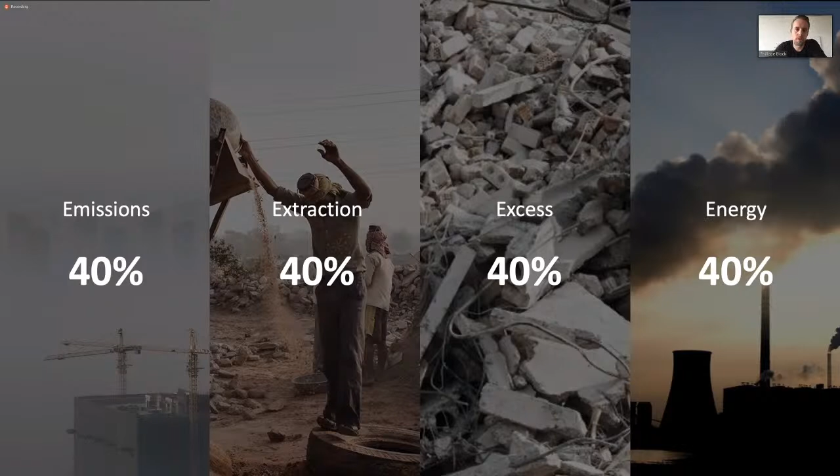We are responsible for 40% of human caused emissions, so that relates to pollution. We extract a huge amount of natural resources. We cause, and these are all global numbers, a lot of excess, which is the waste, and then energy as well. So with these few initial statements, I hope that you agree with me that we do need to rethink how we design our structures, but also how we build our structures. And as a structural designer, I particularly feel responsible to try to act and to react to this.

One has two kinds of emissions. The blue one are the embodied emissions, which are somehow constant. That is what is related to the construction, to the building materials used in a construction. And then the orange one is the operational energy. One could argue, and I'm showing this here on the right, that with greener sources of energy, you can very simply reduce this. But what to do with everything needed to construct your building?

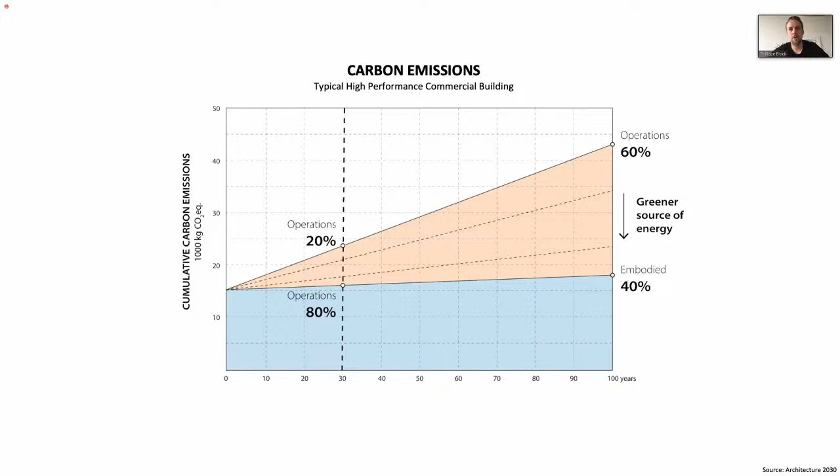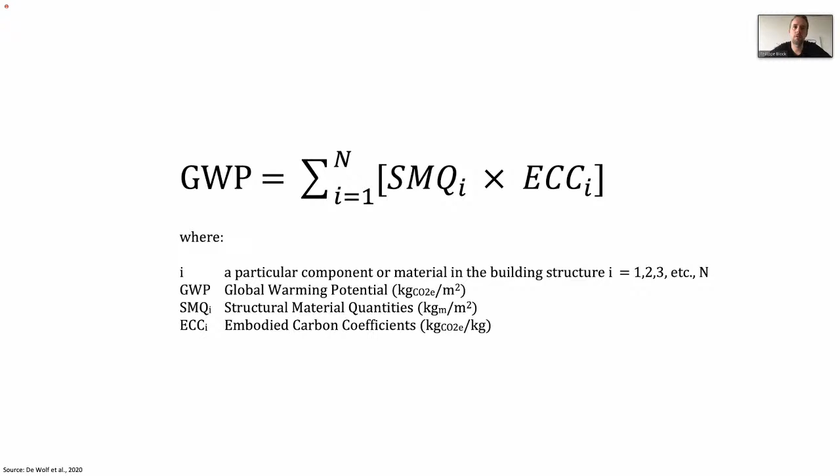And this will be the only equation that I will be showing, it's actually quite simple. You have two things you can work on. Either you can significantly reduce the structural mass, so the volume of structure used, or you can, and that's the ECC, reduce the impact of that specific material. I will show strategies how we use strength through geometry, but also something which we coined as material effectiveness to address these things. Notice that material effectiveness is not entirely the same as material efficiency, and we will see why that is important. And as introduced, we use computational design and digital fabrication as opportunities to bring these potential innovations to market.

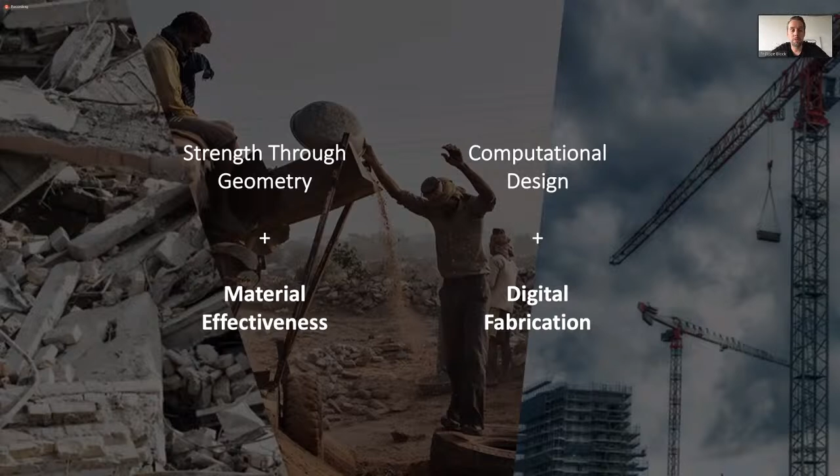My group is now exactly 11 years old, and in the first decade, roughly, we did a lot of prototypes, a lot of exhibitions, we had the opportunity to work with some star architects to have this kind of visibility. This was extremely important, and I believe these kinds of demonstrations are very important to start a dialogue with your colleagues, but also with people from industry. But all of this is really not enough. So now we are trying to get to that next step and make things really happen. I'm looking forward to the next decade of hopefully impact and not just appearing in magazines.

So first, before I go to the main point of strength through geometry, I want to tease a little bit with a few things that we are doing by combining computational design and digital fabrication. And for that, I will also show a shell structure. So here, maybe a first hint that double curvature is really good.

This is a Pringle, so a chip, carrying 500 times its self-weight in quite a bad loading case. So this maybe already shows you that geometry can really help us to create a robust or stable structure.

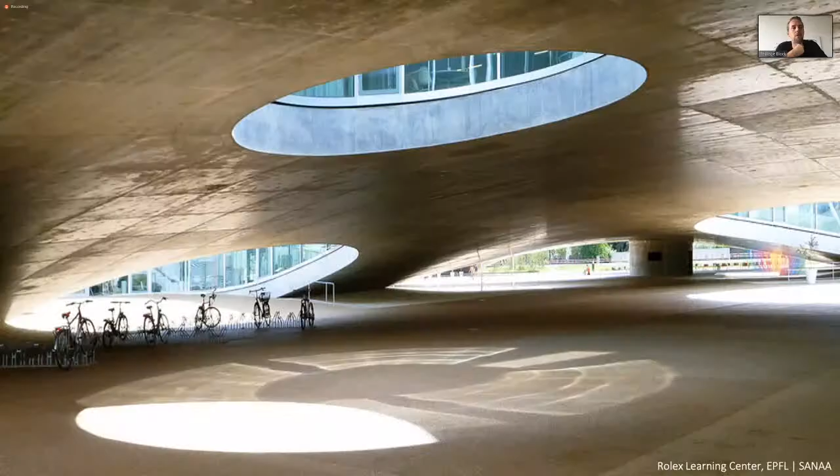But we don't see too many beautiful surface structures, for example, in concrete, only for unique projects like the Rolex Center in Lausanne here. And this is only for unique projects because they need a unique budget. And this unique budget goes to providing a full foundation, all the scaffolding, then often months, if not years, in fact, of milling and fabrication of a formwork that will turn into waste after only 28 days.

So we wanted to challenge this kind of process by introducing or further developing flexible formworks or super lightweight formwork that takes out much of these inefficiencies. So this is a hybrid cable net and fabric formwork. And in a nutshell, this slide maybe nicely summarizes what we're after.

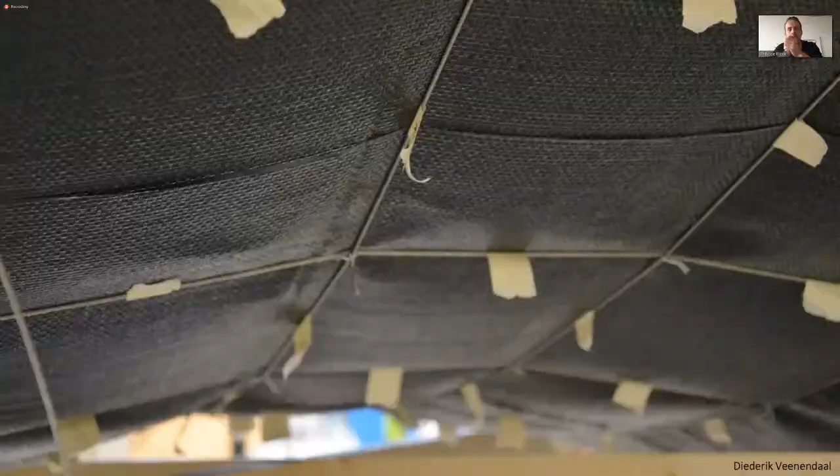So on the left, you see the status quo, where basically through brute force, a fully rigid formwork, you keep the geometry where it needs to be. And then you see indeed the foundation, the logistics, and also the cost of scaffolding, but then most importantly, the formwork strategies that are almost standard one-offs.

And on the right, you see what this could offer. So you can significantly reduce boundary conditions, so foundations, but also you can practically take all waste and material out. You could even design it to be reusable. I will talk about this later. But also you see that the space below can be already used so that the next stages in construction can happen.

One thing that has to be said is that nothing comes for free. So if you want to have these efficiencies, then you need to design also a formwork that follows the logics of how to generate a stiff formwork. So it means that you cannot just have an uninformed design and then try to make it with an efficient formwork. No, you need to fully embed into your design process the limitations, but in my opinion, also the opportunities of such formworks.

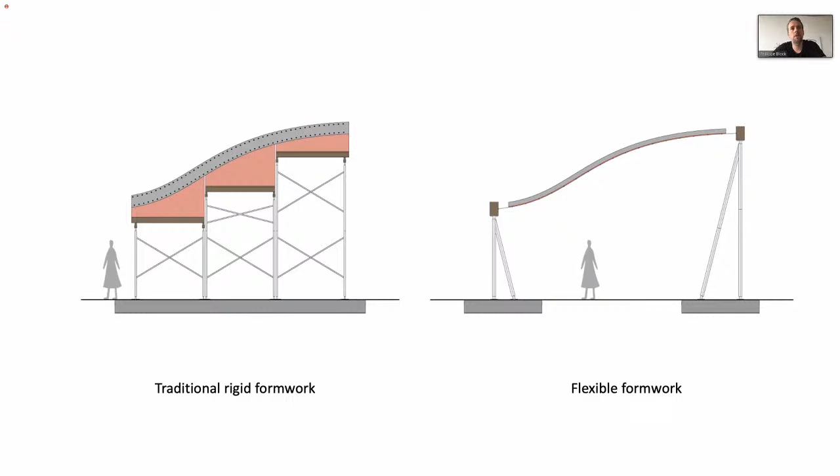So the idea is to use something so lightweight to build a concrete shell. So this was the cable net of a prototype we finished in 2017 for a project that is now on site. And you maybe already see how lightweight this system is. So for a concrete shell of more than 20 tons, we will be using a formwork of only 800 kilograms. So here you see 500 kilograms of cable net.

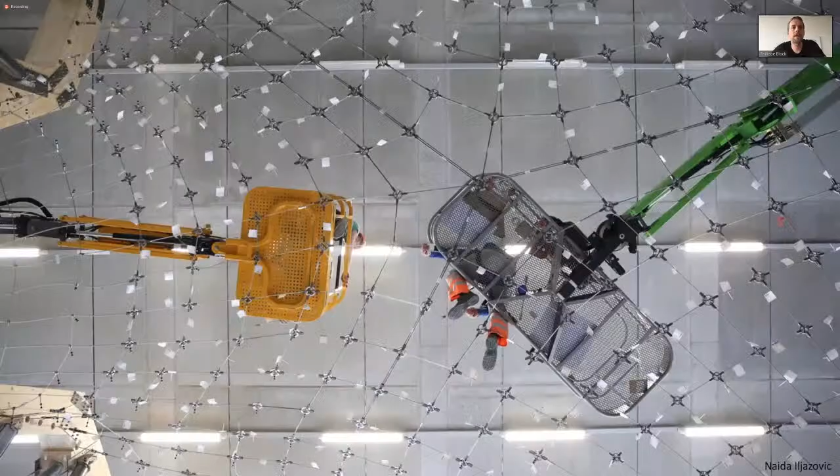We designed it such that it came together like a kit of parts by a very small team of 3 people in just 1 week's time. And again, this might sound a lot, but compared to literally the months of preparation, of milling, also the assembly, the complexity on site, I would argue to realize this non-standard geometry with this kit of parts is quite an easy task.

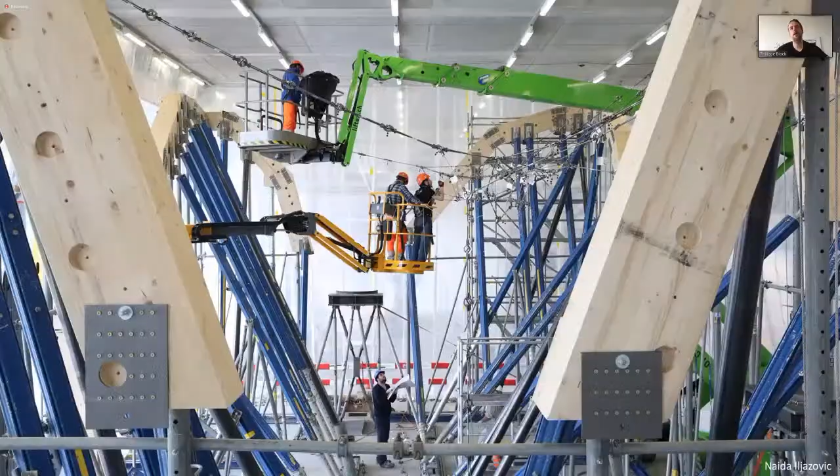Then after this cable net is assembled, the fabric comes on top. We had to, of course, develop some algorithms to correlate the pre-stressing of the cable net to get it exactly where it needs to be, because the system here is actually pre-stressed so that under the weight of the concrete, it settles and it hits exactly the perfect geometry.

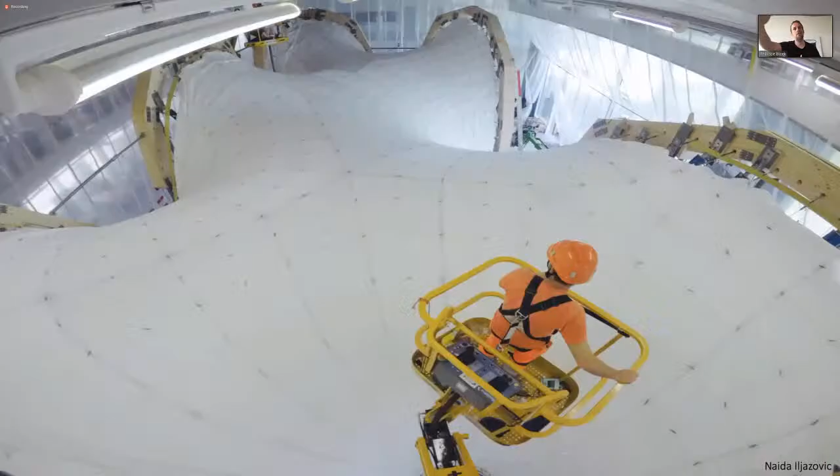So this image maybe gives you a little bit of sense of the scale. This was a shell of 10 meters width by 20 meters and then 7.5 meters high. So almost 180 square meters of concrete surface. And this was done on this fully flexible, reusable formwork system.

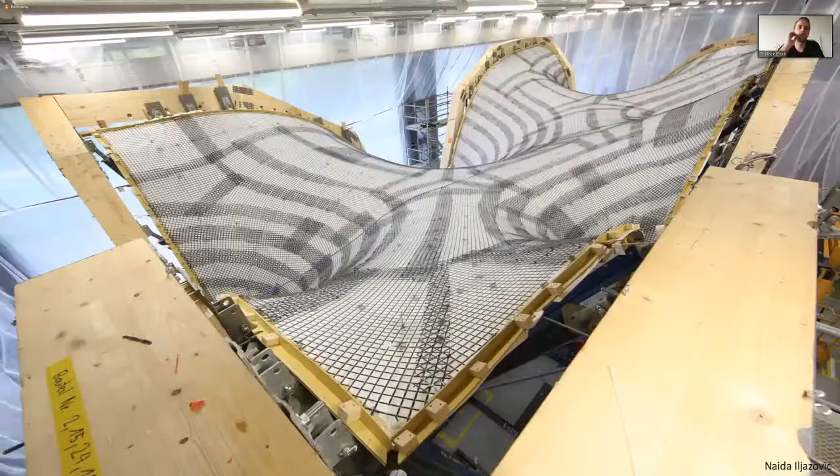And this is a huge opportunity: now that we are rethinking this forming, we also rethought how to do all the sequences on site. So for example, the nodes were designed such that they also became on the same axis of the node. We had the space holders to basically define the local thicknesses of the concrete, but also, as you see here, to attach the reinforcement.

For the prototype, we used carbon fiber mats, a very efficient strategy because it allowed us to reduce the thickness of the shell to only what structurally is needed, but also to only use one layer, which would be much more complicated with typical reinforcement.

So here you see then the concrete being applied, and this was a nice success in 2017, this prototype. So again, we are talking about 20 meters by 10 meters by 7.5 meters, so quite a large surface, and the thickness goes from 3 centimeters at the edges to 8 centimeters at the support.

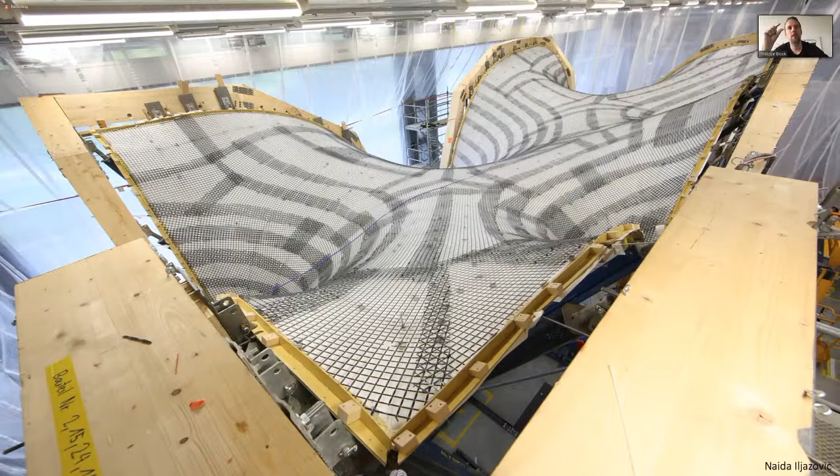Something that maybe you notice here is that this is of course not the famous Swiss architectural fair-faced concrete. So there are some imperfections in the concrete, but because we did the entire process with our industry partners, they knew exactly what happened where, and they were the ones that actually gave the client the full confidence to go forward, because they signed, they promised that the next one would be perfect indeed.

So this is something that maybe shows already that if you can really rethink the entire process and the links between engineering, fabrication, and then execution, that you can start to reintroduce these efficient structural forms at a realistic cost, and more importantly, also time frame.

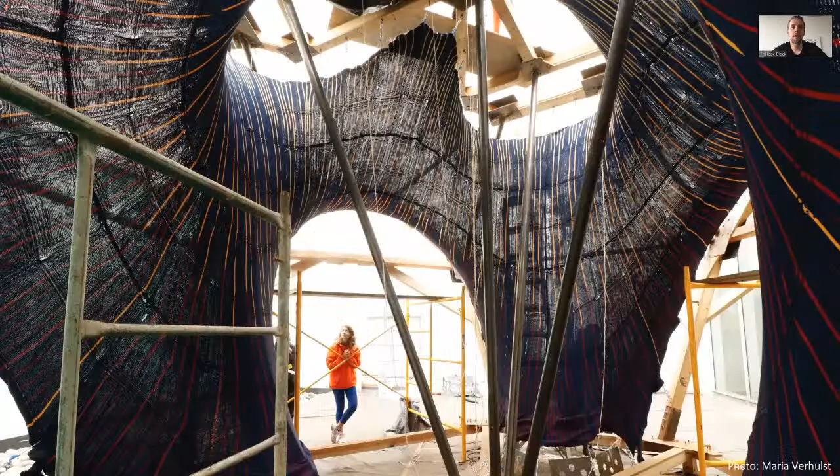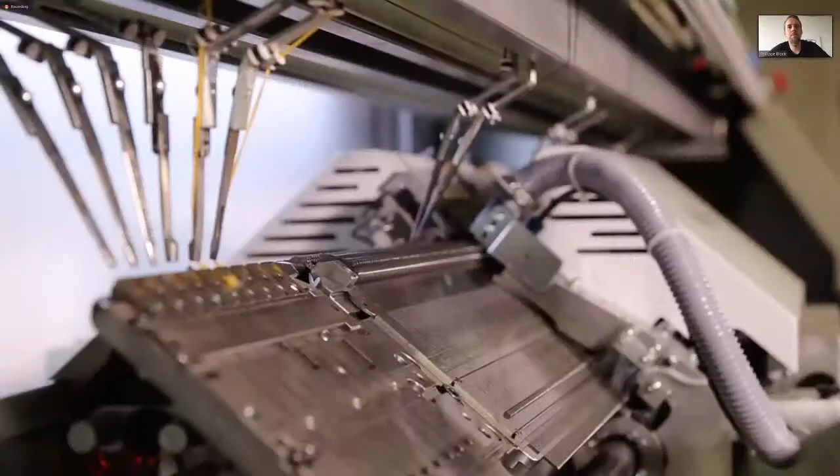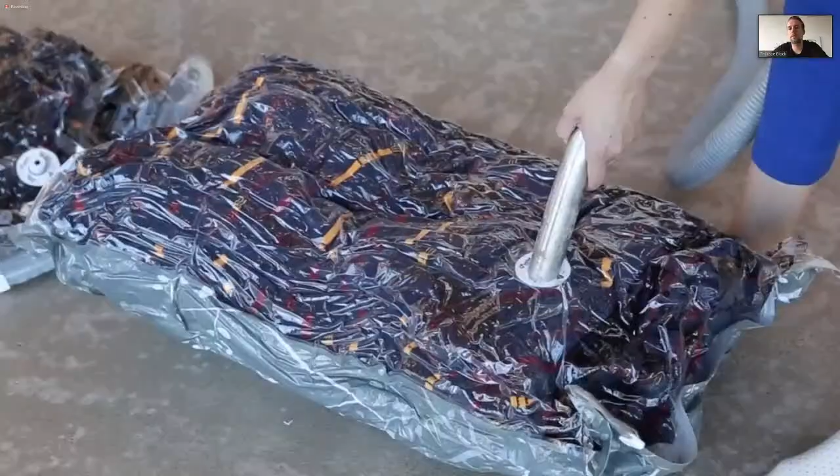So again, this is how it looks. So it has these 2 beds. And then for this project, arguably, we built the largest scarf in the world. So here you see this knit being laid out. But what was interesting is that we then vacuum packed it, and it could be brought on site just-in-time delivery in just 2 suitcases.

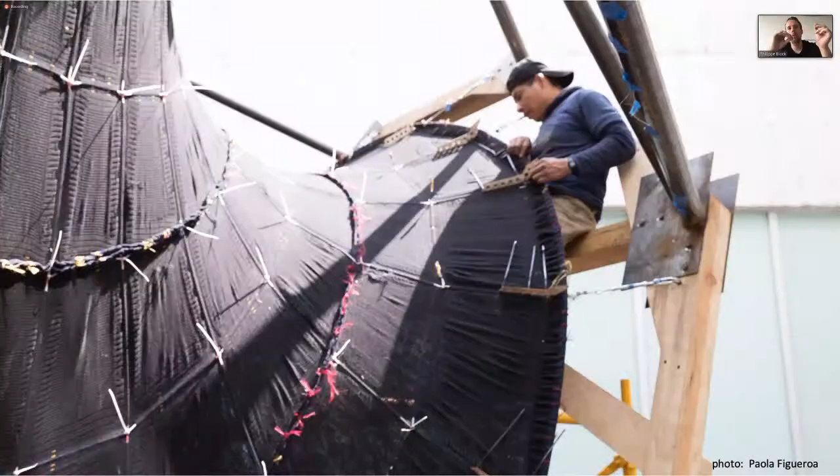So what's interesting about this knit is that in this knit, we basically embed all the non-standard components. So it is this 3D knitted textile that gives you all the relevant references and non-standard pieces that on site no longer have to be assembled or placed in the right place. It can just be tensioned into place.

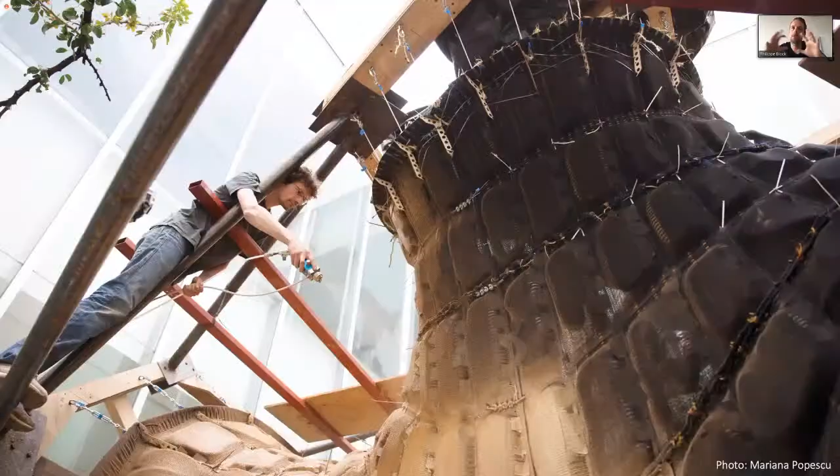Then together with our colleagues in civil engineering, this is Lex, they developed an extremely cheap, fast-setting cement-like paste that allowed us to basically freeze this geometry, so stiffen this knit so that together with its good double curvature, but also with this very small coat, it becomes like a standard formwork.

And maybe you notice here already these little bubbles. These bubbles were inserted. These are little balloons that are controlled and constrained by the knit geometry to actually, in the final shell, generate these ribs in the 2 directions. So these become pockets into the rib. And so this allows us basically to generate a very sophisticated shape with such a simple technique.

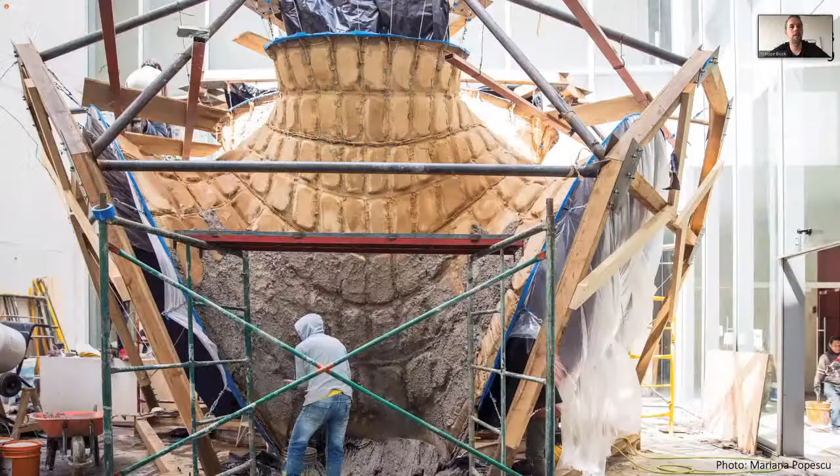What I thought was exciting about this project, which we did with Zaha Hadid Architects in Mexico City, is that I knew from experience from other projects that Mexican crafts are on an extremely high level. So they have the habit to do high standard concrete finishes. And so what we achieved here, I think, is the right insertion of digital fabrication.

So rather than going on site and taking everything over and ignoring the local opportunities by bringing in robotic whatever, we actually just provided a better canvas for the local workers to do what they do extremely well. And that is something that I really enjoyed in this project, this exchange over multiple continents and building upon each other's strength indeed.

So this was then the result. It was still a pavilion indeed, but nonetheless of roughly 6 by 6 by 4.5 meters, so a large surface of concrete, more than 50 square meters of concrete. So this shell weighed about 5 tons.

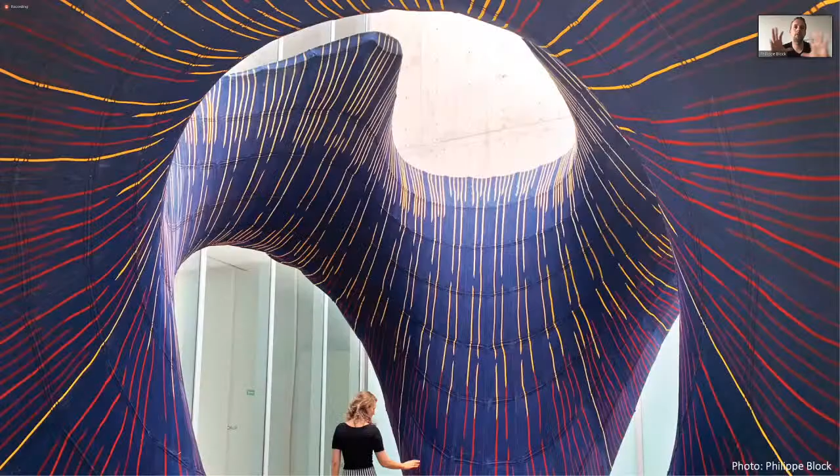In this project, unlike the shell that we showed earlier, where we took the formwork down, here we wanted to try to explore another materiality for concrete. So we kept the knit as an exposed, different kind of finish on the inside of the geometry. But here from the top again, you see how thin this shell is. And this thinness was possible because we had these ribs running in two directions on the inside, created by the cavities in this two-sided technical textile.

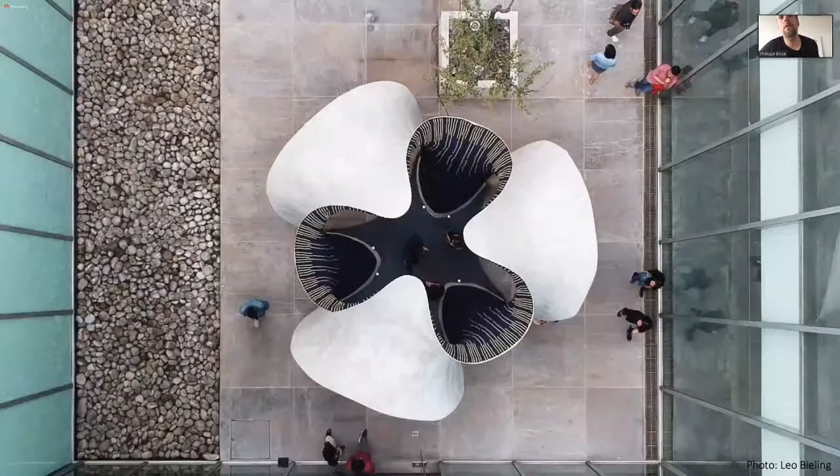But now what is maybe key and why I spend a little bit more time presenting this project is because I think the numbers might surprise you. The entire formwork, except for the external frame, which could also be a reused or rented scaffold. So what am I talking about? The cable net inside. So we again have a cable net that provides the main stability.

And then the knits and all the components related to this cost in total only $2,500 US dollars. That also, by the way, includes the stiffening paste that we put on top. So for such a sophisticated piece, this is not a bad starting point. Perhaps this is also a big advantage, that indeed we could bring the entire formwork on site because it weighed

And this doesn't even include assembly, logistics, and all the challenges that you would encounter on site to assemble such a formwork. And this is maybe an interesting detail: from the very first email from Zaha Hadid Architects inviting us to collaborate on this to the opening of the exhibition, there was only 3.5 months. So this maybe gives you a hint that with such a fully engaged computational process that really takes structures, fabrication, and construction into consideration in the design development, we could rethink the entire sequence, but also the length of phases.

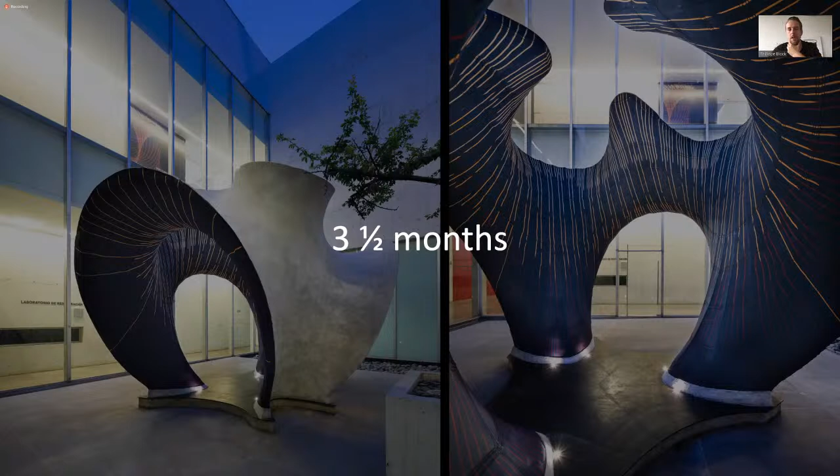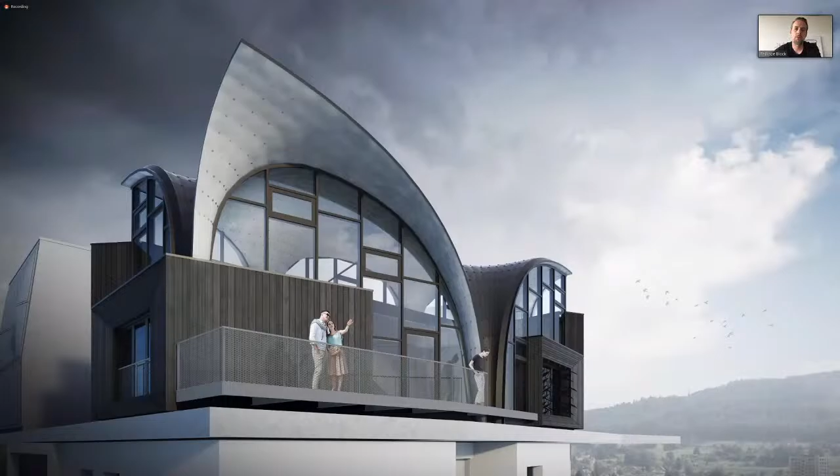So I don't know if you've seen the lecture of Fabio Gramazio and or Matthias Kohler yet, but if you have or if you will, they surely talked about the DFAB house on the NEST platform at EMPA in Dübendorf in Switzerland. But we are building another demonstrator here on the more prominent corner. And it might look something like that, but the key thing that I want to say there is that the roof will actually be a demonstration of what I showed earlier. So this flexible formwork, that is why we did this prototype in 2017.

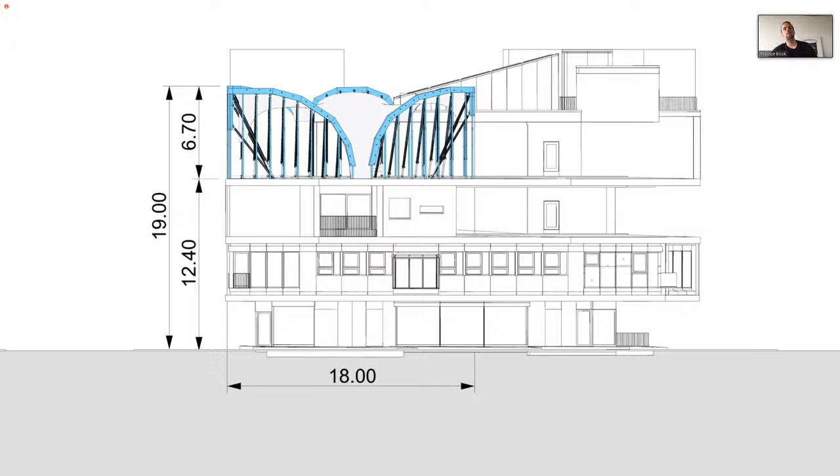But now we have a little bit more of a challenge, that we build on top of a building, which is, I have to admit, not ideal. It's also not an ideal demonstration of what we want to show here, but this project gave us that opportunity. Mainly because of building systems and building physics, so insulating reasons, we will be building a 2-layer shell of twice 3 centimeters. So this is actually an outdated geometry.

Let me maybe highlight, you see this axis here. This axis comes from the nodes of your cable net, and they directly allow you to very simply add the shear connectors. They give you all the thicknesses. They allow a very efficient clamping and fixing of the reinforcements. They also give us basically everything all the way to providing the waterproofing and then the solar facade panels on top and so on. What I want to re-emphasize here is that we really use these digitally fabricated nodes as the logistical device to make this crazy geometry suddenly become quite straightforward, because it's basically 40 by 40 centimeter, quite simple patches. A lot of additional testing had to be done.

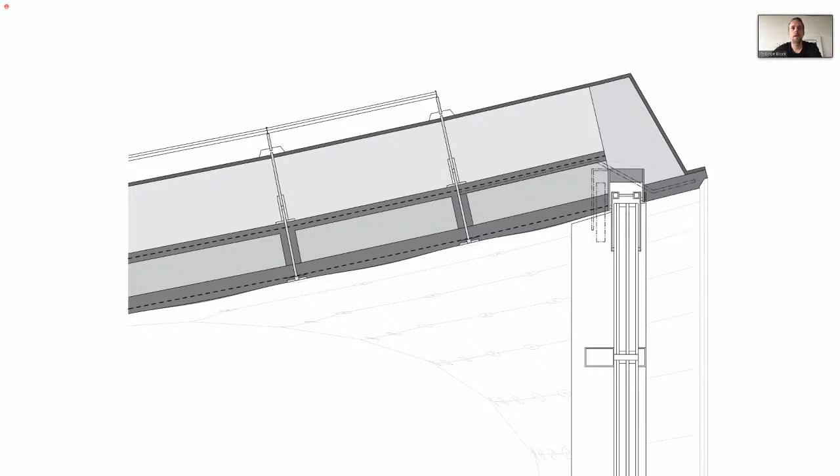And then obviously, because this is a real project, we need also to deal with all these details that you can ignore in an academic prototype. Details like, for example, the channel, because we want to have exposed, visible concrete from the inside flowing to the outside. This is, for example, the detail where the glass facade will disappear in that concrete facade, so as not to have a thermal bridge. So basically to make sure that also from a building physics standpoint, everything works.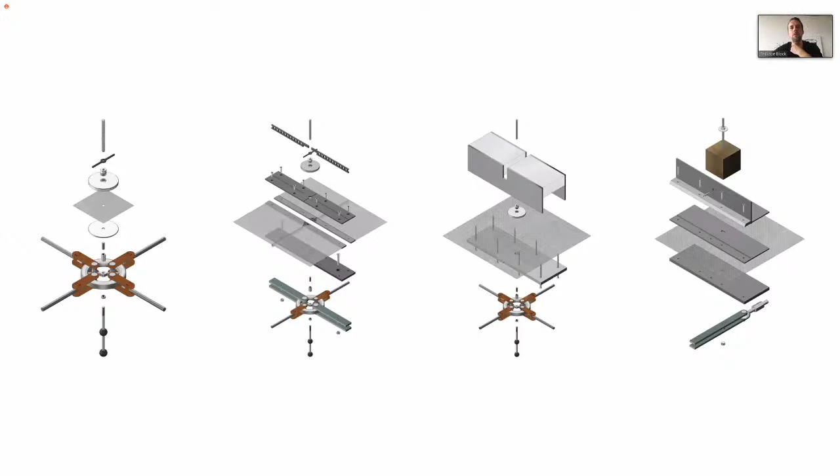The client asked us to guarantee that we can build within 0.5 centimeters of tolerance, which you probably know for concrete is absolutely absurd. But here we are doing some prototypes demonstrating how precisely we can build. And then I look forward to seeing the expression of the imprint of this fabric in this concrete.

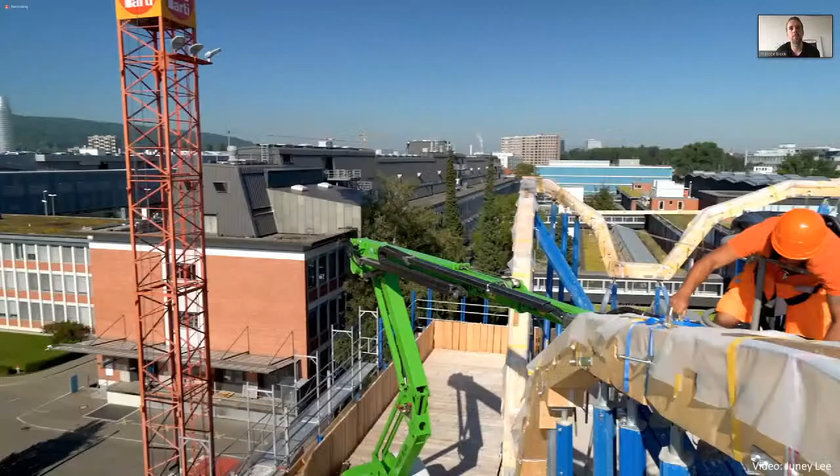Here, this is a snapshot of just before the winter break. I want to point out maybe the cleanliness. So look how clean, how simple the building site is. This is not only because it's Switzerland, but also because the system is really designed to be put into place very simply with a small team. As I said, we needed to develop some algorithms to readjust this flexible formwork so that it's exactly where it needs to be.

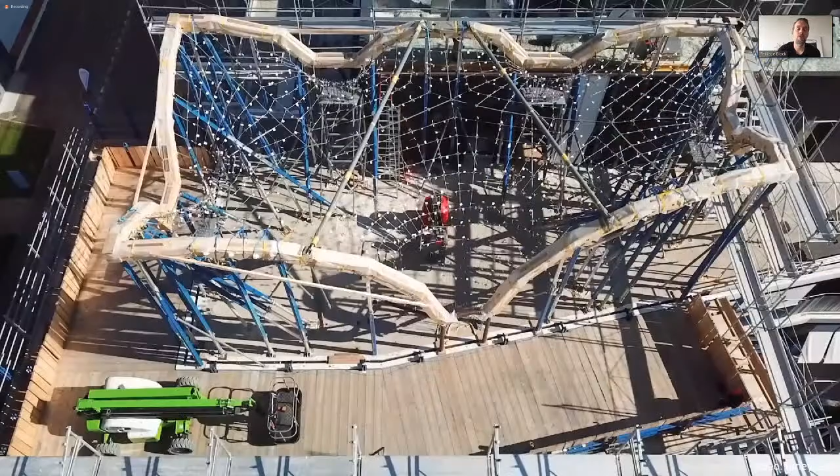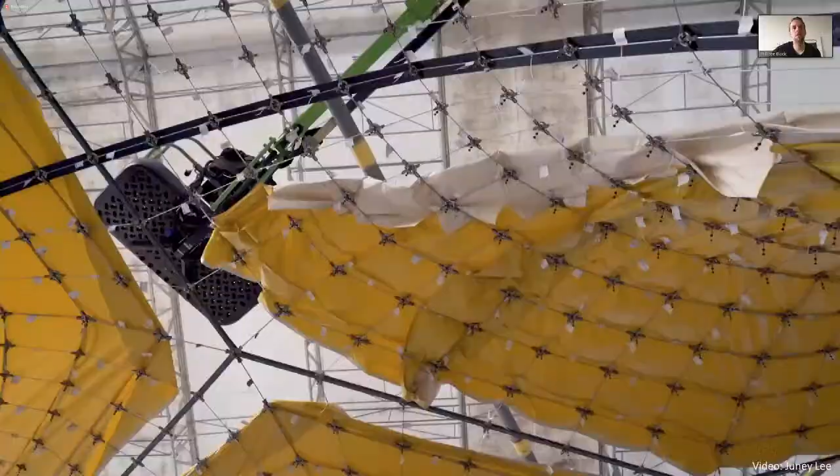And so here you see this team assemble the fabric. Another reality of trying to really introduce such disruptive ideas into a quite conservative building industry is that you need to do a lot of things yourself. So this is actually my own team, the Block Research Group, assembling this formwork. So we're not only computational, but I guess also now non-standard formwork experts.

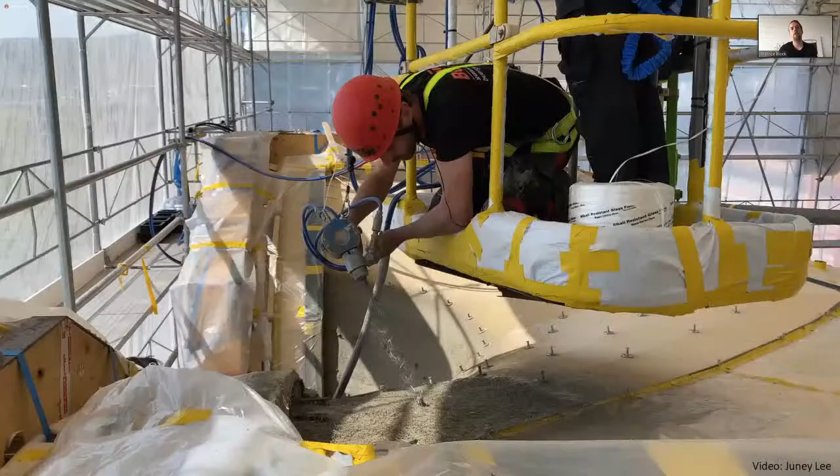So here you see just before closing, and then, exciting for us, 3 weeks ago they started with the spraying of the first layer, which is now finished. And so here you see that the very first thin surface layer has a little bit of fiber reinforcement in there in order to prevent any cracks. So here now we are with the first layer done. You see all these little bits sticking out. That is where then very efficiently the shear connectors will be connected on the insulation blocks, and so on.

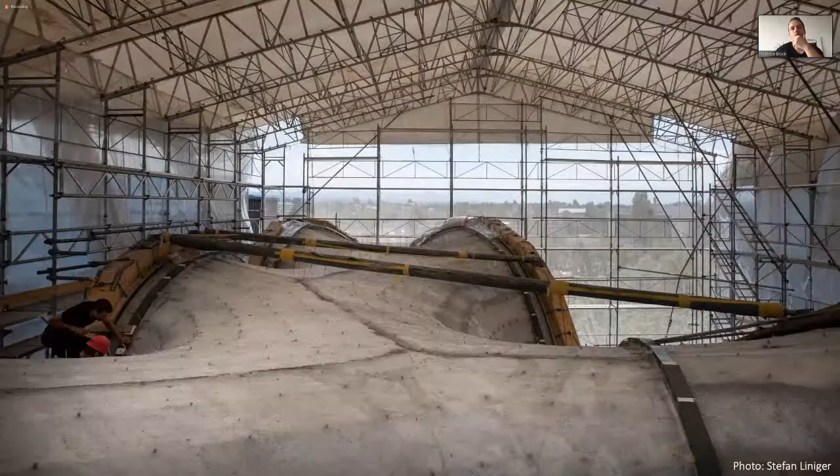So in a way, this very crazy geometry is being delivered. Everyone here on the Swiss side seems to be surprised how smoothly this process is working. But as I kept emphasizing, none of this comes for free. All of this needs to be pre-planned, simulated and designed from scratch. And that is why we have in the last 5 years been developing this open source, Python-based framework, COMPAS, to allow us to collaborate, but also to exchange knowledge and solutions with other people.

Mainly with research institutions. So COMPAS is not something like BIM, but it's really a centralized, lightweight handling of geometry and attributes and information to then generate all the relevant information for our partners, many of which in this process have barely any digital competence. And so we're really challenging these approaches in a context where we are not working with specialty contractors, but with very standard, more conservative partners.

And indeed, when you start from this kind of geometry kernel where everything is matched, there is no hindrance to also embed on the top level these new algorithms that we had to develop to generate non-uniform pre-stress values, to then take this geometry directly and automatically run the engineering analysis, check the fabrication constraints on the bottom left, or even steer the total stations to do the measuring for the control systems to retighten and loosen the geometry. So this for us was a nice demonstration of rethinking the typical sequential design and execution process to have a more integrated, holistic approach.

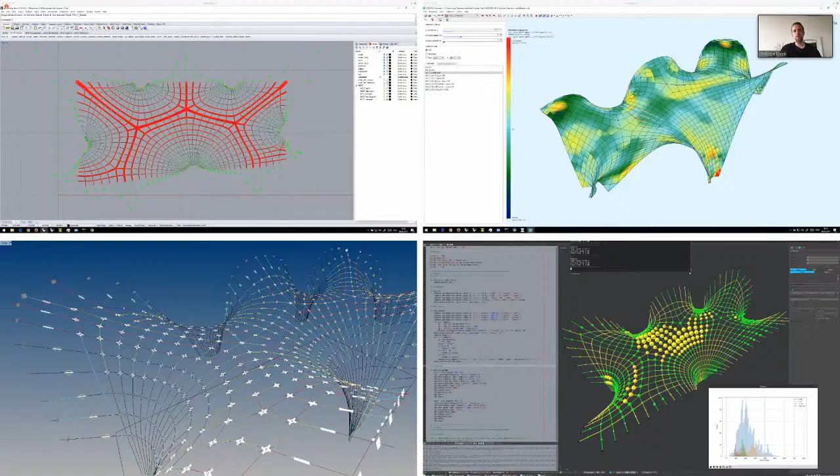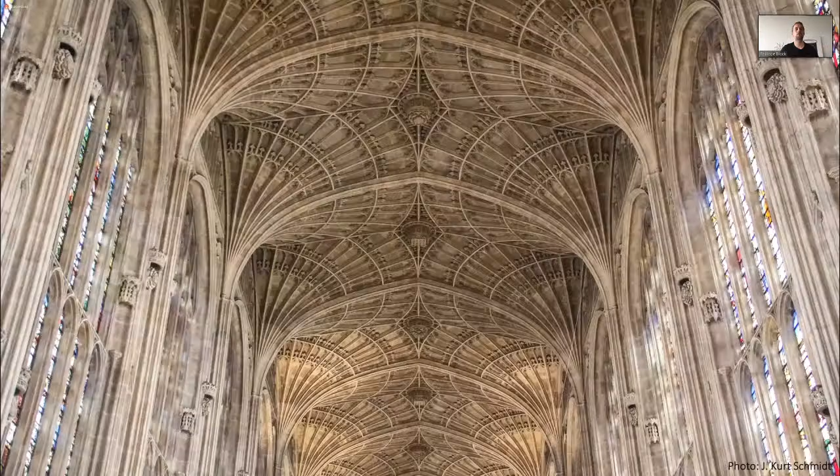Okay, but the key message for me is strength through geometry and material effectiveness. For me, all of this fascination started during my PhD at MIT, where I developed a new method to understand the safety and stability of historic structures in unreinforced masonry, in brick, in stone, and so on. As, for example, these beautiful fan vaults at King's College at the University of Cambridge. They've been standing for centuries without reinforcement, just because of their good form. And this shell is proportionally as thin as an eggshell. If you were to cut an egg in half and measure its thickness over that span, this is how thin these unreinforced structures are.

So in the beginning of the BRG, we started to develop computational tools, like RhinoVault, that allow designers to explore these kinds of forms while understanding their equilibrium. But as you know, you can do whatever you want on the computer. You can simulate or suggest anything. So that is why we took the 2016 Venice Biennale to try to clarify what this really means, to shake our colleagues, to shake the community, to show what you can achieve when you get the geometry right.

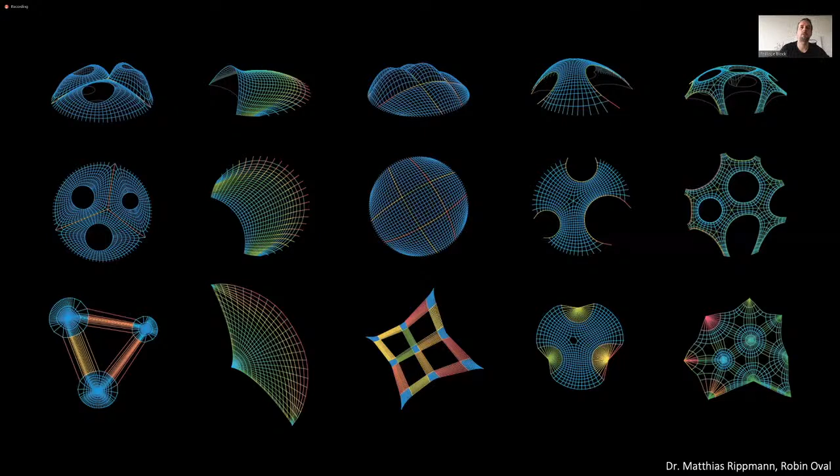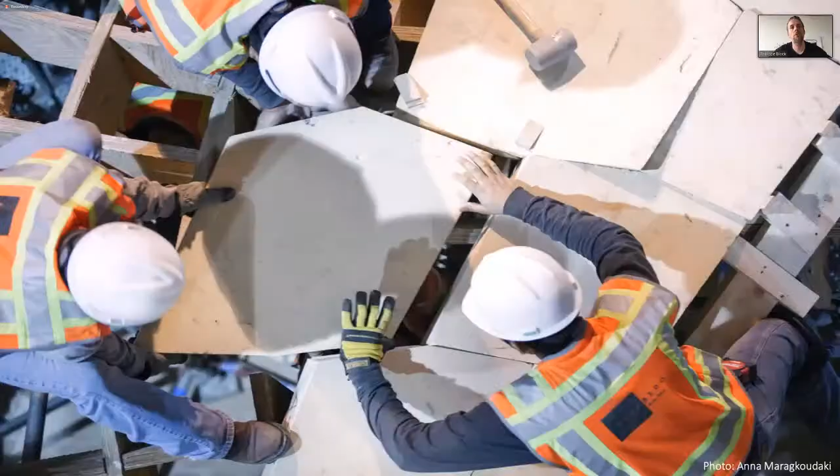So we have a very thin shell of an average thickness of 4.5 to 5 centimeters. Only locally to the supports, we increase a little bit. And here to just show some details of the assembly, this is just dry assembled. So this is really no trick. These are 24 tons of stone that are kept in space because they have a good geometry, a structural geometry in equilibrium.

So we took an opportunity also: this shell was optimized for fabrication. That is why it looks so specific. It is flat on the inside and it has this very efficient carving on the outside. Of course, this is not the very first thing that we do. We had done many prototypes before. This was actually a funny day in 2011. One of the first things we ever built, an unreinforced shell, a tile vaulted shell.

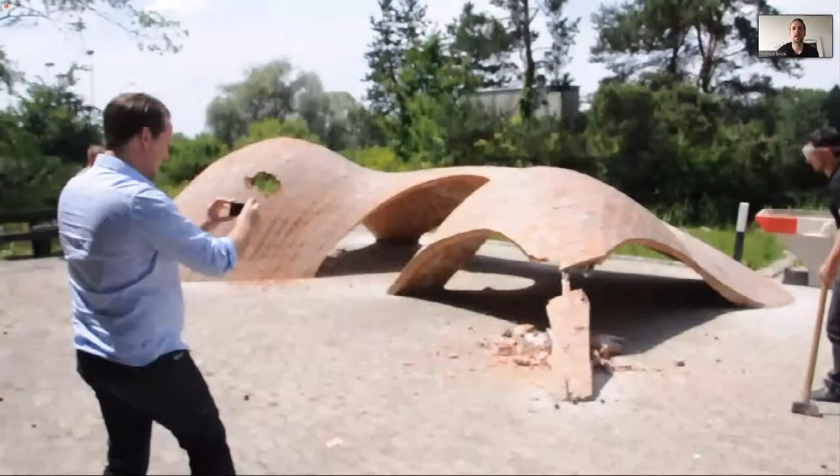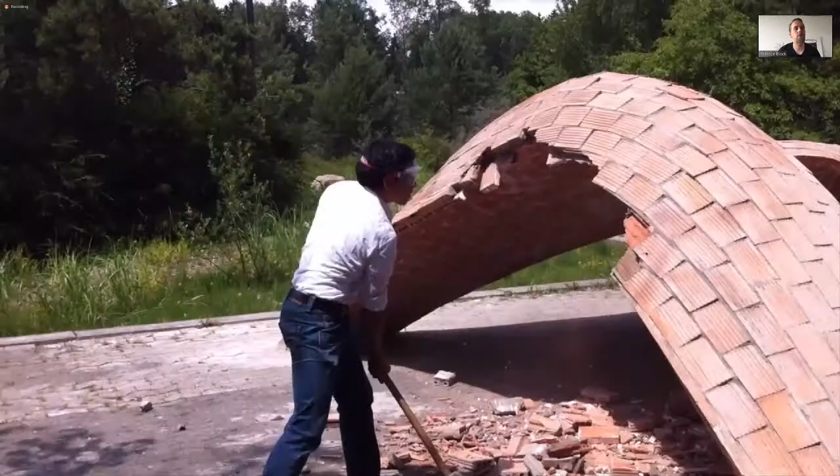And here you see that double curvature gives you really a lot of robustness. And indeed, that was inspired by a historical technique. Maybe you know these beautiful vaults. This is at Grand Central Terminal, the main train station in New York City. This is the Oyster Bar. And these tile vaults, so what you're looking at is not just decoration, it's actually one of 3 layers of

unreinforced tiles that are laid in a specific technique, but they're laid without any formwork. So they're built basically in space, starting from stable boundary conditions with a fast-setting mortar and a lightweight tile. And that was actually a perfect premise to bring these kind of techniques back for context where material is expensive or scarce and where labor is still plentifully available.

And this was then, I was happy to be involved in this project that was finished in 2009 during my PhD. The architect is Peter Rich, and John Ochsendorf did the structural design, but Michael Ramage from Cambridge really did most of the planning, construction, and execution. This is a very remote location in Mapungubwe in South Africa. It is a museum where basically this traditional technique was introduced and done only with local resources.

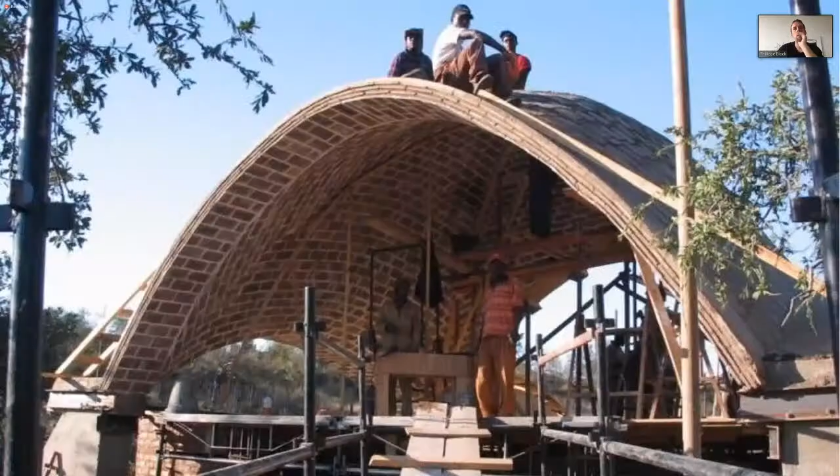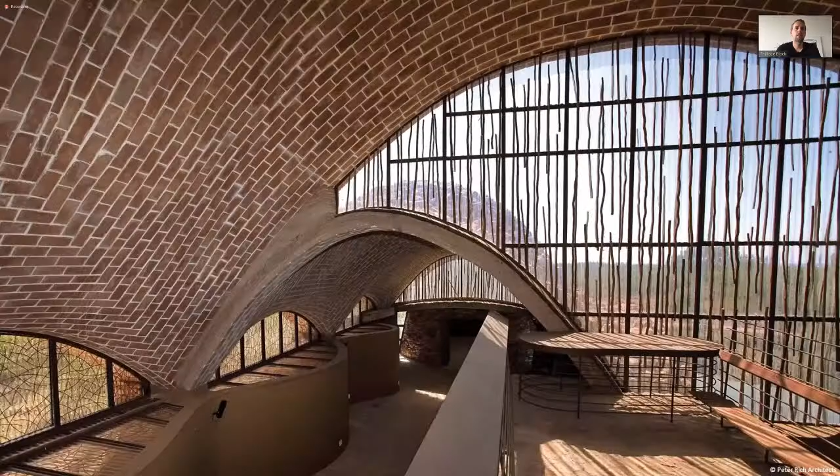So here you see local farmers and carpenters that were introduced into this technique. And even these very large scale structures were done again by these local laborers, just under minor supervision with also local material. So here you maybe see why this is such an efficient technique. The timber you see on the inside, by the way, is a reusable guide. It's not a formwork that you build on top. You don't touch this, but it actually basically guides where the geometry needs to be. Very important, of course, when you literally build with unskilled labor.

So the white is this fast-setting mortar, and then you build up additional structural layers. But the reason that I'm showing you this old project is because of these two images. On the right, you see that tiles are being carried in very small packages. And that is because this is actually a picture of week 2. First week was a total disaster, and I'll tell you why.

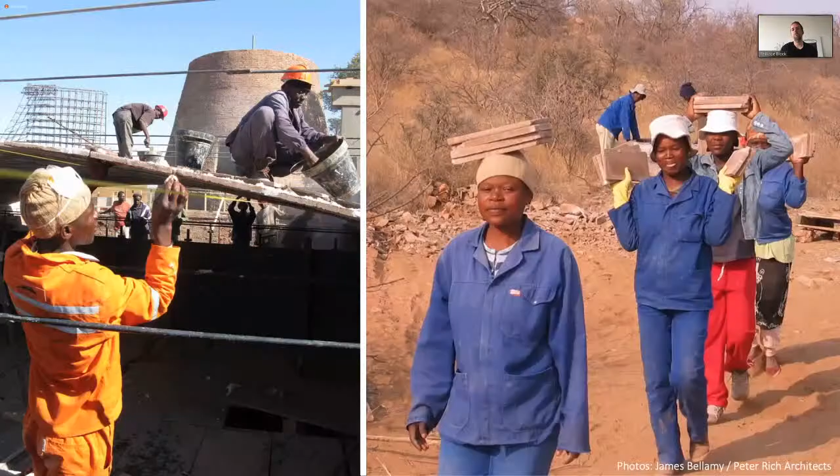The tiles are designed to only take 2 megapascals in compression. 2 megapascals in compression is 10 to 15 times less than a standard concrete being used. So it has barely any compressive strength, but what is very scary about this structural material is that if you take one of these tiles in your hand, you can just break it in front of you. So it has no bending capacity whatsoever.

And that is why these happy women are carrying the tiles on site in week 2, because the men in the first week could not be bothered, and more than half of the tiles arrived broken on site, which obviously was an issue. Why am I emphasizing this weakness through this small anecdote so strongly? It is the image on the left. This is actually the permanent floor of this museum. And you see these same tiles, if you place them where the forces want to go in compression, become very safe and robust structural materials.

So this, to me, was an eye-opening experience, and also an extremely important lesson, that geometry is so important that you can start to really use local, very low strength materials. And an important aspect about this is that these tiles are made just by compressing soil with a little bit of cement.

So I think roughly 7% of cement to stabilize those tiles. And that's it. So you actually use the local soil, there's no transport needed, and only a very small percent of imported materials. This works because an arch is a very good geometry for a certain loading case. But if you don't have double curvature, like we had in the Armadillo vault, the stone vault that I showed you at the Venice Biennale, then you need something else to take live loads.

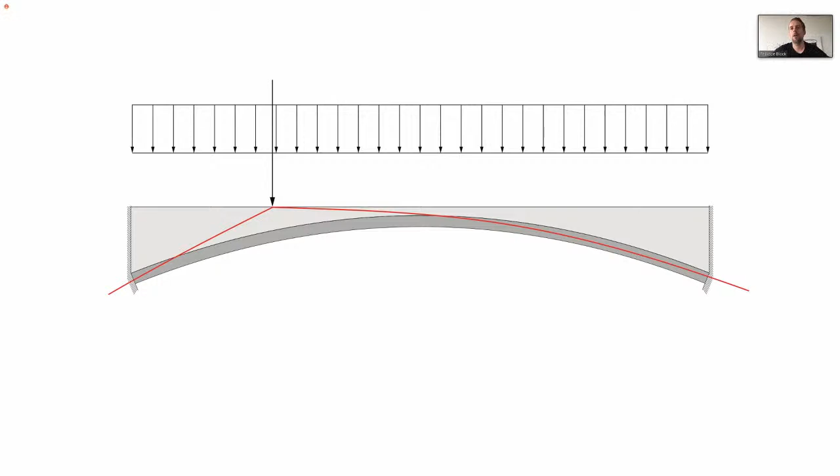So another strategy then to activate double curvature is to locally add stiffeners. And so you see basically what these diaphragm walls kind of do. They provide an additional structural depth, so an additional opportunity for load paths in compression to safely travel to the supports. If you now add a tension tie to resolve the horizontal thrusting of this arch on its neighbors, in these last 15 seconds, we just developed a 70% lighter equivalent of a floor plate.

You see, basically, a reinforced concrete floor plate would need to have a cover to cover the reinforcement for fire and corrosion and so on. But you see that so much material absolutely would not be needed. And this just by reintroducing a common sense system that was very well known and used all the time historically, but that we have somehow forgotten in our design vocabulary.

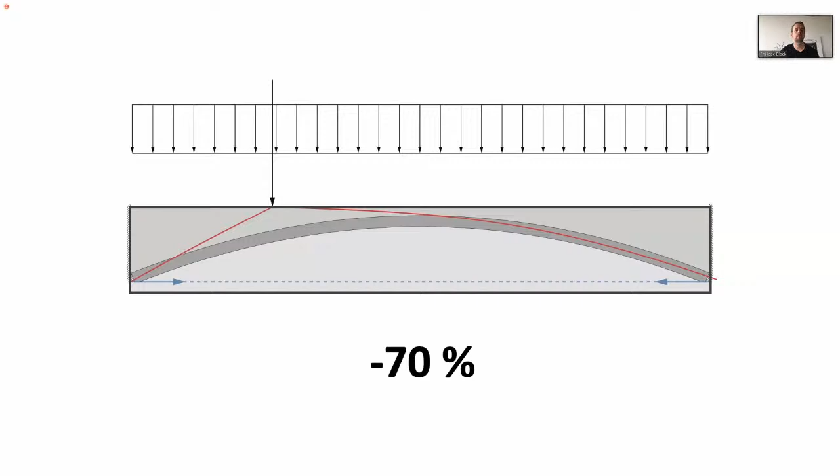So here, this was already successfully implemented in this Mapungubwe project. And you see that in this case, the tension ties also serve as lighting fixtures. And of course, this was done in a context where we try to challenge this, where low-cost housing cannot really be low cost, because they're trying to build like we do in our inappropriate concrete ways. And in the process, they waste a lot of material. It's expensive because a lot of material needs to be imported. And also what I started with, the pollution of such construction needs to somehow be addressed.

At a certain point, I was challenged by my colleagues at ITA that, okay, good that you work in Africa, fun that you do these kind of crazy things with big architects, but what's the real value? What is the real purpose? What is the real opportunity of your research? And that is where we realized that, while introducing these vernacular forms in a developing world context, we actually also have a problem in our context.

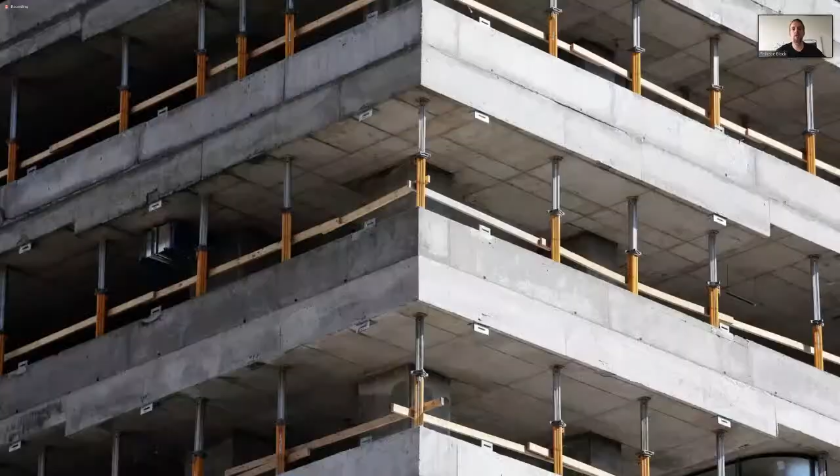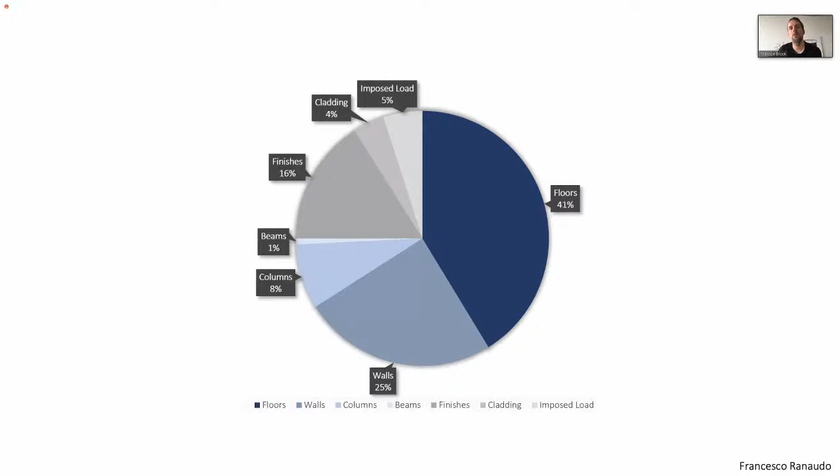And the problem is more specifically all these floors that we need to build all over the world. Because if I come back to this pie chart that I showed you earlier, for medium high rise, so 10 to 40, 50 story buildings, 75% of the weight is in the structure. We can refine this and notice that of these 75%, more than half is in the floors. So of the total weight of the building, 40% is in spanning space, in the floors. So this is really a very significant bottleneck in efficiency, and hence a very significant contributor to pollution, resource depletion, and all the things that I talked about.

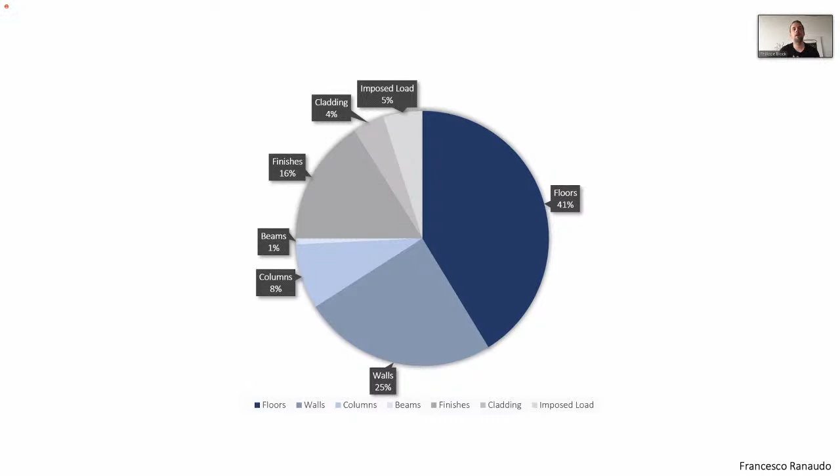And this is where I want to step back and clarify the difference between material efficiency and material effectiveness. So you must know the worldwide agreement on how bad concrete is. This was one of the voted best articles of 2019 in The Guardian that described at length that concrete is the most destructive material on Earth. That is absolutely correct for how concrete is being used right now. It is basically being used in a way that it doesn't want to be used.

Concrete is like an artificial stone. It wants to be kept in compression. It doesn't want to be a beam that needs to bend. That is exactly where everything goes wrong. And you see this if you, for example, look at the embodied energy per unit mass, you see that concrete on the bottom there, and this is a logarithmic scale, by the way, outperforms all the typical building materials that we have.

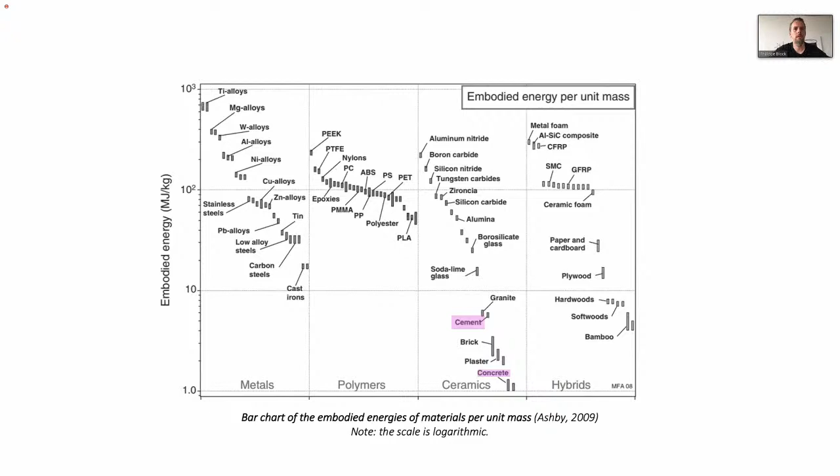Again, I told you that maybe energy is not the key criteria, but emissions is, so the associated equivalent carbon dioxide, CO2 emissions. And there you see that actually concrete again does quite well. So basically what I'm trying to say here is that it's not just necessarily about lightness, but I believe that you will hit those efficiencies when you use all materials how they want to be used.

So for example, if we want to use concrete, we want to use it in compression. So we want to use it with a much less volume than we do. And I already gave you a hint at how we can do this. Just by going from bending to the tied arch, we save more than 70% of material on the concrete side. So that means that we're placing concrete only where it needs to be.

And so relating back then to their emissions, if we were to use concrete how it wants to, I would argue it is probably one of the most sustainable strategies, because it's a material that we know can be produced relatively locally and also at the large scale of the construction that we imagine. Of course, nothing will ever beat sustainably sourced timber, but all calculations hint that if we would replace all constructions, which by the way for infrastructure is not possible, in timber, we have just not enough forests available to do this in a sustainable way. So we need many solutions.

And I just wanted to, in this small side note, clarify that I also believe that the world needs to have a much more nuanced and much smarter discussion on sustainability, and really understand what are really the bottlenecks. And so my point here is that concrete is not necessarily the evil if we start to use it how it wants to be used.

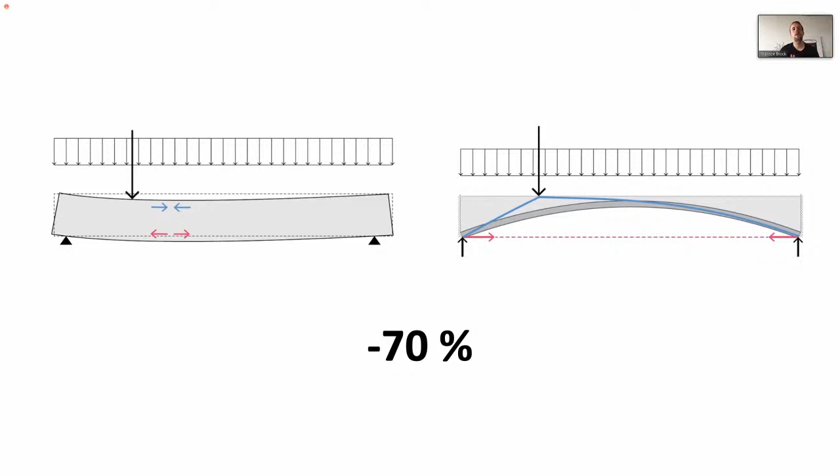And that is then what we started to demonstrate in our 3D floor plates. So this was something that we developed already many years ago, a 5 by 5 meter floor where you only need 2 centimeters of unreinforced concrete because you externalize the tension ties very much like the tied arch that I talked about before. This we also showed at the 2016 Venice Biennale.

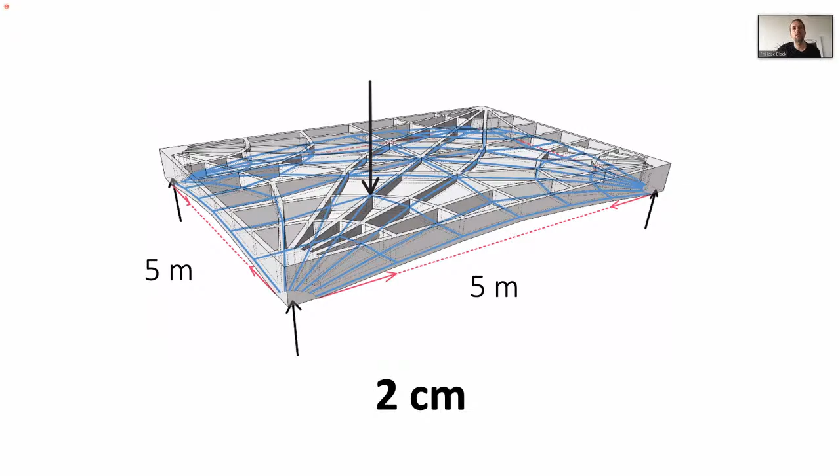And this is actually a very nice kind of provocative prototype because this prototype here uses the same concept, but is fully sand 3D printed. So it's using an equally weak material as what we used in South Africa, 2 megapascals in compression. I don't know why all these weak materials seem to end up being around 2 megapascals. But if you hold it in your hand, it breaks in bending.

So what we are doing here is we're doing the American Concrete Institute's recommended protocol to apply all the loading cases needed. And we just demonstrated that this very weak material can actually be a fully safe structural floor indeed. If this image doesn't convince you, maybe 1.2 tons of ETH nerds standing on a 2 centimeter unreinforced floor plate with material properties equivalent to cold dark chocolate might maybe convince you.

When I started with this research 5-6 years ago, when I presented these results for the first time, engineers were extremely skeptical and they said this is very academic and so on. But then I confront them with, again, this same project, because if we go back to the oyster bar, these beautiful vaults are built with equally weak materials. They're just simple tiles. They're unreinforced, and they have 20+ meter spans. The thickness to span ratios are similar to what we're doing here. So we're not doing anything new.

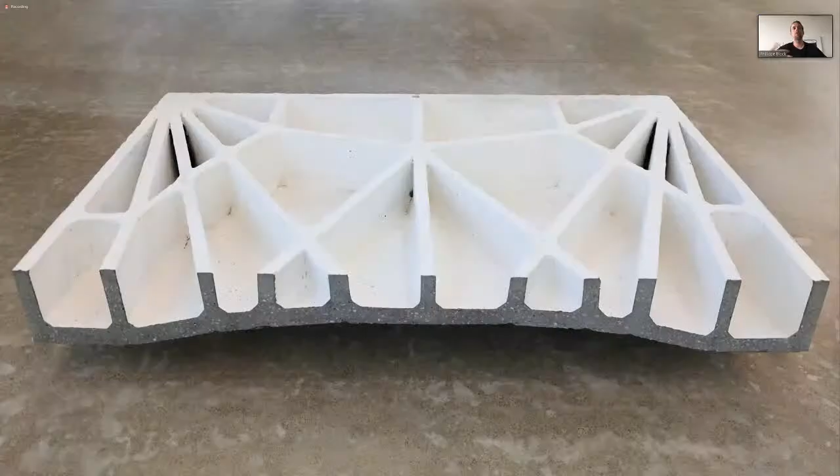And you see also that these cavities can be activated to start to think about a more clever way, rather than layering all these systems to literally avoid any clashes, to actually be much more responsible with the floor heights, and by that offering our clients at least 25% additional real estate in the same total building height, for example.

For those of you who build, you might immediately think, what about acoustics? Super lightweight floors are problematic. And this is where, again, I might have some really good news for you, because what's super exciting here is that we are using structural stiffness rather than adding mass. The typical brute force strategy in architecture to avoid contact noises or the transmission of low frequencies through lightweight structures is actually to add mass.

So lightweight steel and timber buildings need to add mass, add concrete typically, in order to resolve the acoustical problem, while here we don't have to do this because we activate the structural stiffness. This is something very exciting. We are in early development here, but we have demonstrated already that these floors that are so lightweight can have a reduction of 30 decibels on these problematic low frequencies.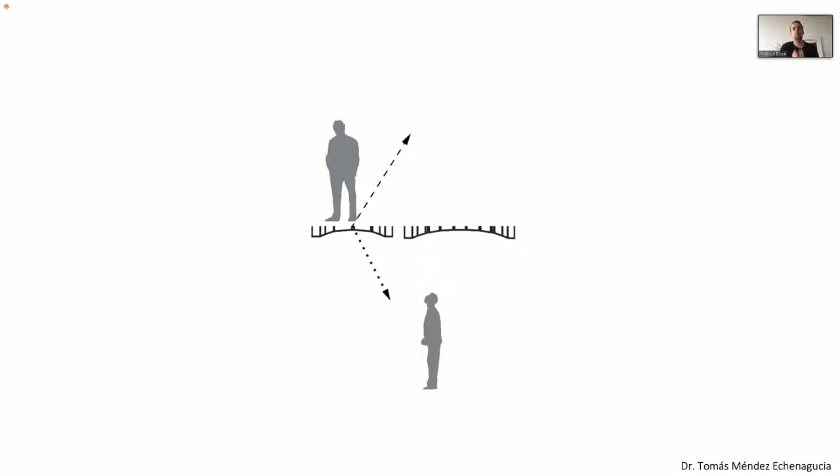On top of that, and I don't want to impose this as a style, I am not interested in that. You can hide these beautiful floors, but I also enjoy that these floors become a very exciting, beautiful geometry if you want to express it indeed.

So in summary, the floor elements that we developed are 70% lighter. They have only 1/6 of the embodied carbon, and 70% would be 1/3, but that is because they are made from recycled content. In fact, we are using 100% recycled aggregates, so basically from building rubble, and 50% recycled cement. That doesn't mean adding fly ash and all the typical tricks that are done to reduce the clinker cement. It's really reusing used concrete construction and extracting the cement to embed it in this new concrete.

So at the current state of development, and we have many ideas with our colleagues in material science to go much better than that, we are at 1/6 of the embodied carbon emissions. And also not unimportant is the reason that we can go so thin. We don't have to cover our reinforcements. There's no embedding of reinforcements. So we separate compression and tension entirely. And that makes it very easy for long-term maintenance, and at the end of life to very simply recycle these components.

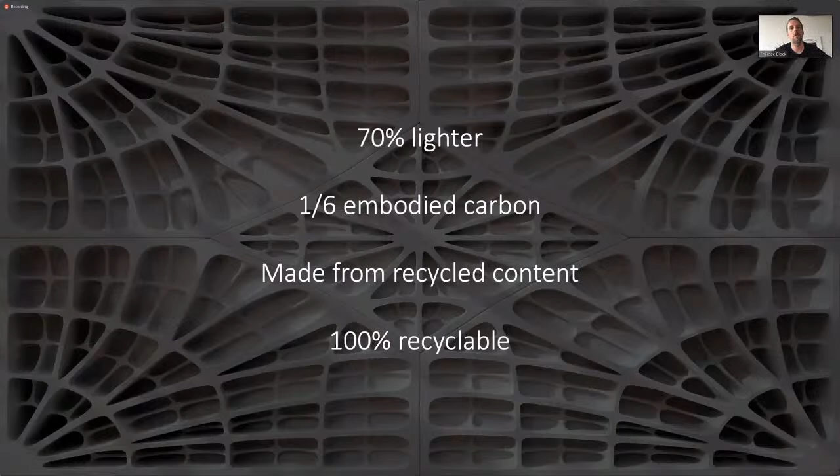So just to bring this point home, the reason why we're pushing this research the most of all our research currently is this simple calculation. Let's look at one of these typical medium high-rise buildings. So 25 stories, very simple plan, very traditional core building. If we look at the floors, you have a flat slab on the left. That is the current code-regulated solution. The 80% is by adding post-tensioning, which is not done all over the world.

The 50% is the HiLo floors. We're actually building a first version of this in the same unit that I showed where we had the big roof. But there we had to still make some compromises because it's the very first unreinforced concrete funicular shell floor in the world. So we had to come to an agreement with a local engineer of record, and so not all efficiencies are in there yet.

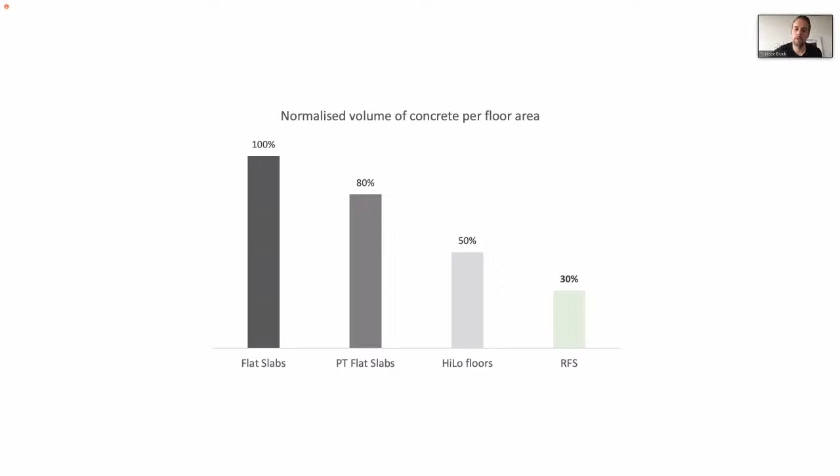So then the last one, the Rippmann floor system, the RFS, that is the one where we really will hit the 70%. So on the total volume of concrete in the building, this causes a reduction of 35%. What does 35% mean? Again, we are talking just about one building of 25 stories high.

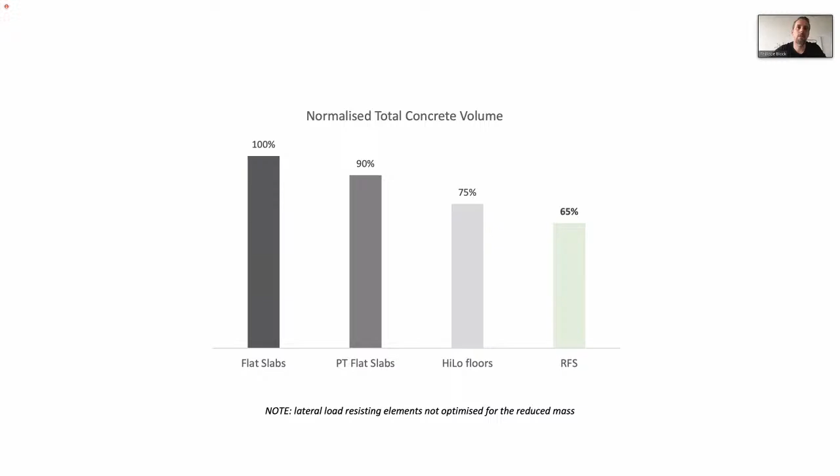That means a reduction of 7,500 cubic meters of concrete. If that again is very abstract, that means that for this building we would need 1,208 concrete trucks less, right? So this is a significant amount. That is how much less material in this one building.

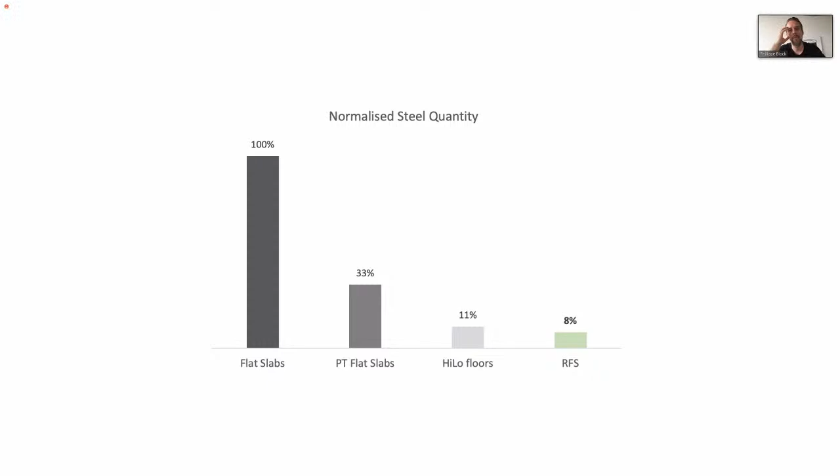But then this is actually an additional key advantage, is that, and look, the HiLo floors, again, not optimized, we already reduce the amount of steel by 90%, right? 90%. And so that means that per floor, we can take out 20 kilometers of reinforcement steel. And then coming back to the chart here on the different impacts of different materials.

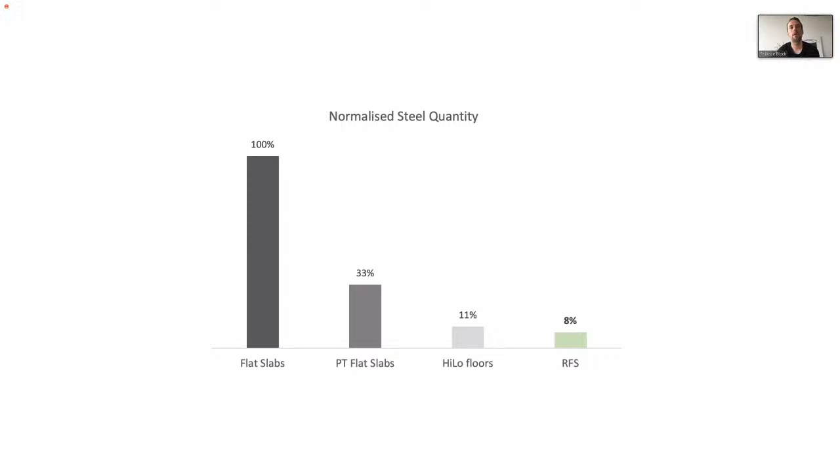So we are significantly reducing the concrete where it needs to be, so it becomes actually a totally sustainable material. And then the much more polluting material, the steel, we only place where it needs to be. So actually, both aspects count. I said about 1/6 earlier; the 1/6 is only considering the concrete benefits. Now we are at 1/12 of the embodied emissions. So we have a fraction of the emissions because we only use steel where it really needs to be.

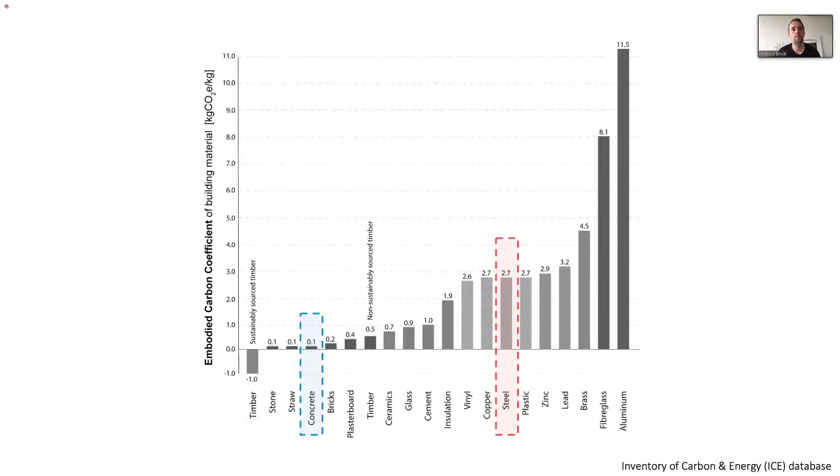So again, this is just for one building, and we need many of these buildings all over the world. But there is another reality: some of these buildings will still be in China, but most of them will have to be in places like India, in the entire continent of Africa. And that is where I am super excited that we started collaborations and we are setting up a spin-off company, for example, in India with developers to commercialize this floor in India. And we also are working with the government of South Africa to implement this in new government-provided housing solutions.

So for me, these are the targets. It's relevant. Good structural form is a good strategy all over the world. But of course, we want to target these markets where still the biggest difference can be made.

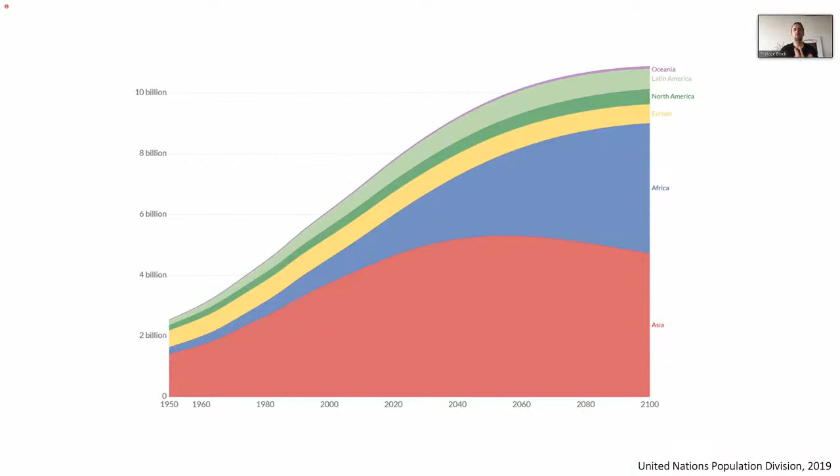That also leads me, you talked about RhinoVault. This is actually a special day because exactly yesterday at 7 o'clock, we released the first version of RhinoVault 2, which is an open source framework which goes beyond a plugin, that is compatible with Rhino 6, Rhino 7, but also Blender, also in the browser, and so on, because it's really an extension, a wrapping, a UI provided for all kinds of packages that are based on the open source framework COMPAS. So if you install RhinoVault 2, which I hope all of you will do after this lecture, then you basically get a mini version of COMPAS with the installation. That also means that you can start to take your geometries to build additional geometry on that.

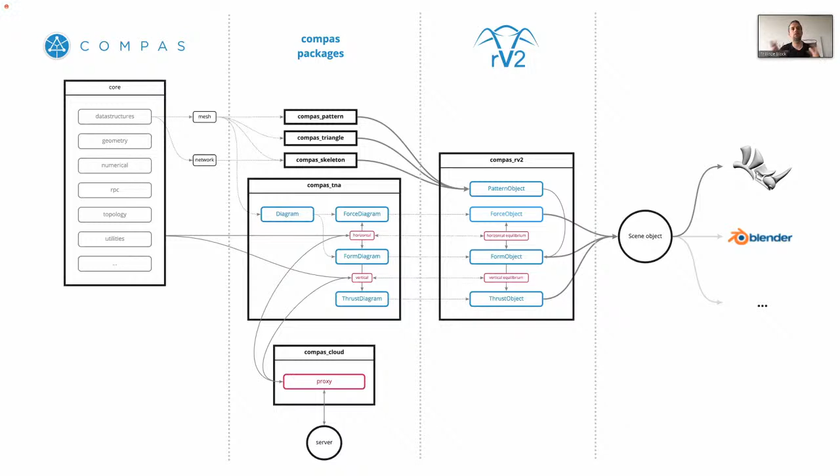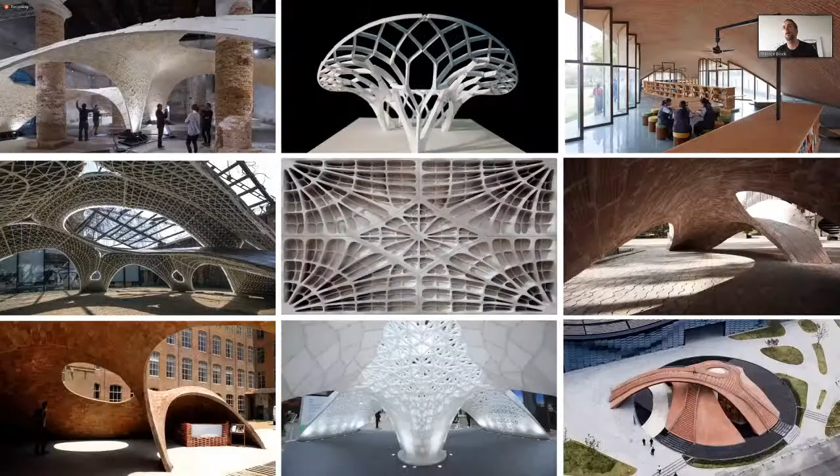So we share all our methods through COMPAS. And so if any of this is interesting to you, then you will find all the tools, all the strategies, all the algorithms to realize or to replicate what we're doing here. So maybe this slide just as a little bit of a call, because I find it super important that we start to share, that we are much more inclusive, open source as an entire industry, because we're all facing the same challenges. Why is everyone reinventing the wheel?

Why is everyone wasting time while we have these true pressures of the planet, and these pressures are caused significantly by our industry. So I call for action, and our move to action is to develop these open source platforms for exchange, like COMPAS, by sharing things like RhinoVault, but also by sharing all our teaching material in graphic statics and structural design. So all my teaching material with Joseph Schwartz can be found on this platform, Equilibrium. So I share these 3 websites with you.

Okay, but so the main message that I wanted to share with you today is that structural geometry, so strength through geometry, allows you to use less material, so to have less volume. Funicular form, so compression-only form, not only allows you to have less material, but also to have very low stresses in the material, and so you can use better material.

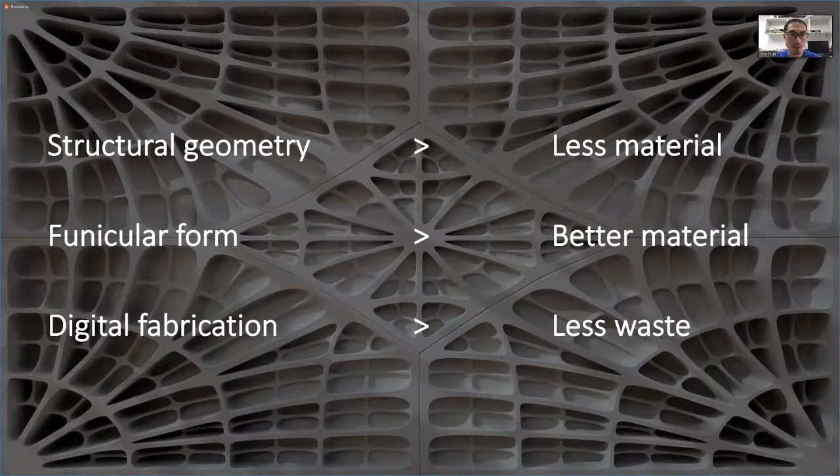Professor Block showed us the latest advances in design, engineering, and construction of doubly curved shell structures, and he revealed the methods upon which the unreinforced shell structures are based. He also shared the latest software, COMPAS and RhinoVAULT. These tools can offer us better understanding of flows of forces in three-dimensional space. And with these design tools and design strategies, we can reimagine traditional materials like concrete and stone.